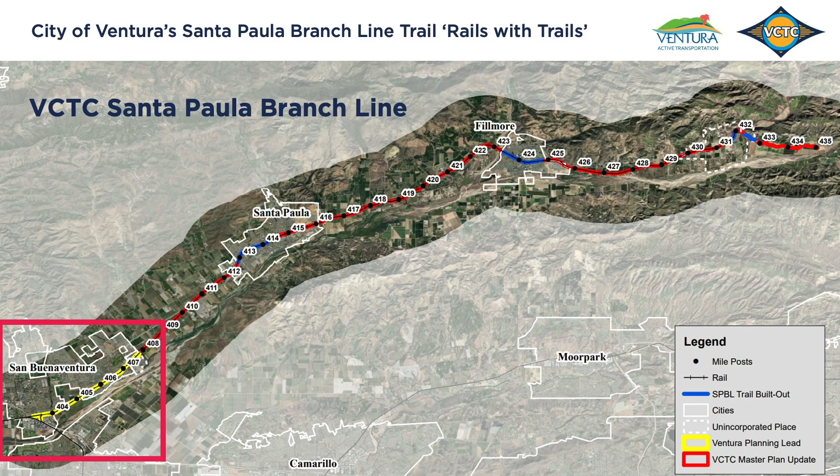Thank you, Martin. Eric, could we go back just to the map? I want to hit a couple of other highlights. I just want to mention that portions of the Santa Paula Branch Line Trail have been built out and have been operating for many years. And so you may have even used them and not even realized it—portions in the city of Santa Paula and the city of Fillmore, as well as a portion in the unincorporated Piru community. The focus of today's discussion is, of course, the Ventura section of the trail.

So the Santa Paula Branch Line corridor presents really a wonderful opportunity to build an active transportation route that is safer than many of the alternative routes along an existing publicly owned right-of-way that was acquired for use as a multimodal corridor. A rails with trails approach facilitates the use of clean transportation alternatives and improves connectivity with transit, which helps to foster transit ridership recovery through first and last mile solutions.

Taking a rails with trails approach has many benefits. VCTC estimates that the Santa Paula Branch Line Trail at full build-out will reduce vehicle miles traveled by somewhere between 23,000 and 46,000 daily vehicle miles traveled. And we estimate somewhere between 300 and 500 bike trips to occur daily on the trail. The trail's estimated to have between $2 and $7 million annual economic benefit and significantly reduce bike and pedestrian crashes within the corridor.

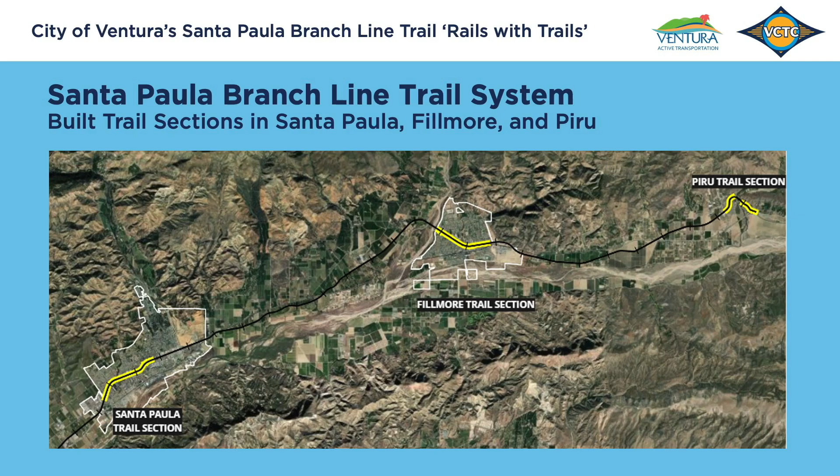In addition, the Sunburst rail bikes operate guided tours on rail-mounted, motor-assisted rail bikes along the Santa Paula Branch Line between the Santa Paula Depot in downtown Santa Paula and Largo Lane, which is west of Fillmore.

So now we'll do just a quick informal poll through a raising of hands, non-attributional, I promise. But which of these trail sections have you visited before? The Santa Paula section? Oh, wow. Fillmore? Piru? Yay, a few. Has anyone been on the Sunburst rail bikes yet? Oh, wow. Has anyone used the Ventura Railroad right-of-way section, but not on the formal trails? Or has anyone not used these trail sections before? Oh, good. So we have a good mix of experienced trail visitors and folks who are new to the trail system.

Because in the interest of time, I won't spend much more time talking about the Santa Paula Branch Line and as a railroad and its history, safety, and other aspects. But if you'd like more information, please do visit our website at goventura.org/SPBL. And with that context in mind, I'll turn the floor over to Brianne, who will focus on the project at hand, the 4-mile trail section in Ventura.

In addition to being chosen for Caltrans Cycle 6 application because of its priority project status, the project was funded because of its cross-jurisdictional support from VCTC and other state agencies. As Adam mentioned before, the project was funded through a collaborative effort.

Caltrans ATP 6 is paying for pre-construction funds, so we're in pre-construction now. That's what we call soft costs — permitting, design fees, things like that. The Congested Corridors program through CTC is what's funding project construction, and that grant funding has a deadline of December 2026. So your trail will be opened by December 2026.

As Adam mentioned before, the project spans the future trailhead in Montalvo all the way out to Saticoy, and this is us here tonight. So 4.2 miles crosses agricultural lands, residential lands, goes near schools, and crosses, as us Venturans know, the barrier that is Wells Road. So it's going to connect our communities together.

The things included in the 2022 grant application include the 4 miles of trail, kiosks and informational signs, bike repair stations, accessible ramps onto the trail, and traffic signals so it's safe to cross — we've got some great exhibits about that to learn about safety on the trail tonight.

Benches, trash cans, shade trees, exercise stations, water fill stations, solar lights so the trail will be illuminated to be used at all times of the year, bike and pedestrian bridges to get across some of our beautiful barrancas, and rest facilities.

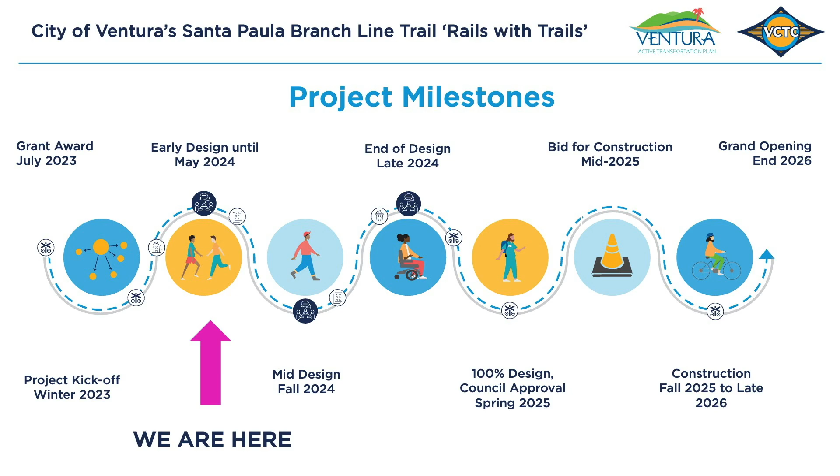It's anonymous, we won't hunt you down. And also show where you'd like to go using the trail. We also have a group brainstorm behind these lovely folks here in the back, where we'll give everyone Post-it notes for you to tell us your ideas about how the trail could be themed — art, signage, wayfinding, things like that. There'll be folks around that station as well to help you with that.

And we've got a few great exhibits about safety and other things up as well. So a little orientation to the project here: this is starting on the west end in Montalvo, looking at the first stretch.

For those of you who might be familiar, we have our East Ventura Metrolink station here, which provides the opportunity for what we're calling the Western Terminus Trailhead, an opportunity to access the trail right at the end of Bunting Avenue. From there, the trail will hug the north side of the rail line to Johnson Drive and encounter our first major crossing.

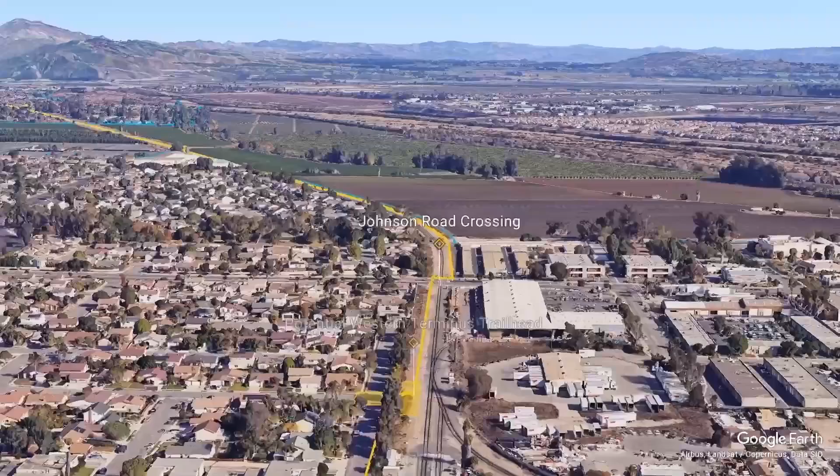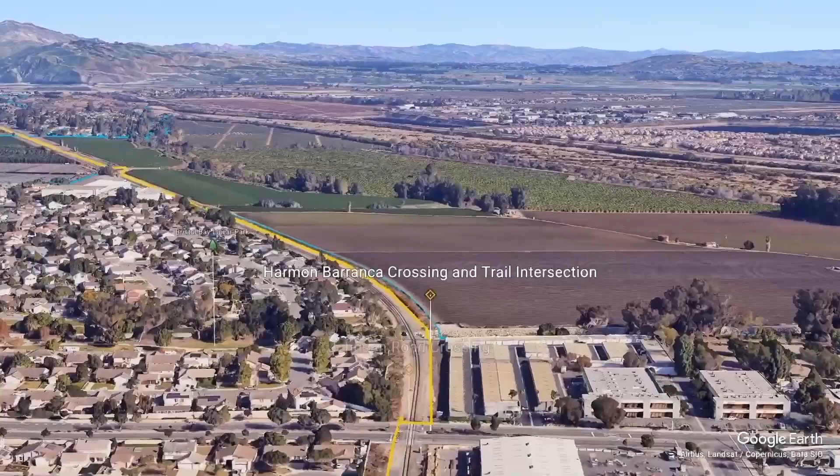Johnson is a very busy corridor, so let's look at how we get across it. Adam will tell you shortly about some of the safety crossings and what that might look like. At Johnson, you're going to see the trail flip to the southern side of the rail line for a couple of reasons. One big reason is it's the prime location to cross Harmon Barranca, our biggest major stream crossing along the alignment.

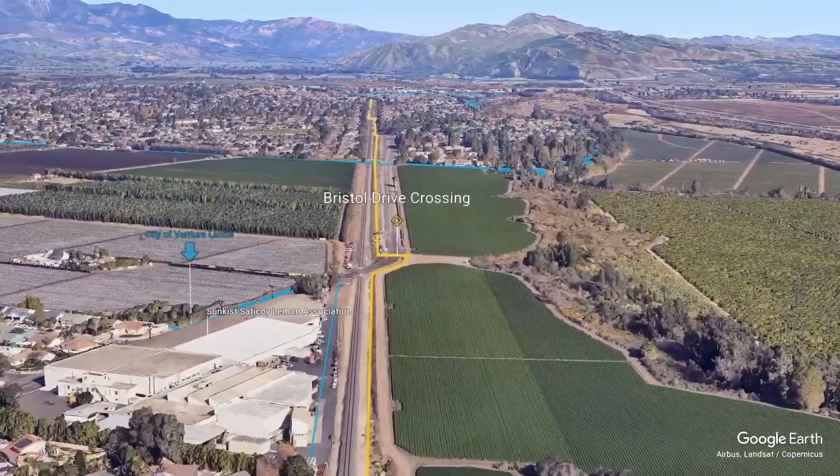The other reason is as we progress further east, the trail is further away from residential properties. It also avoids the Sunkist Saticoy Lemon Association plant and its proximity to the rail line, and provides the most ideal alignment to cross the complicated intersection at Bristol.

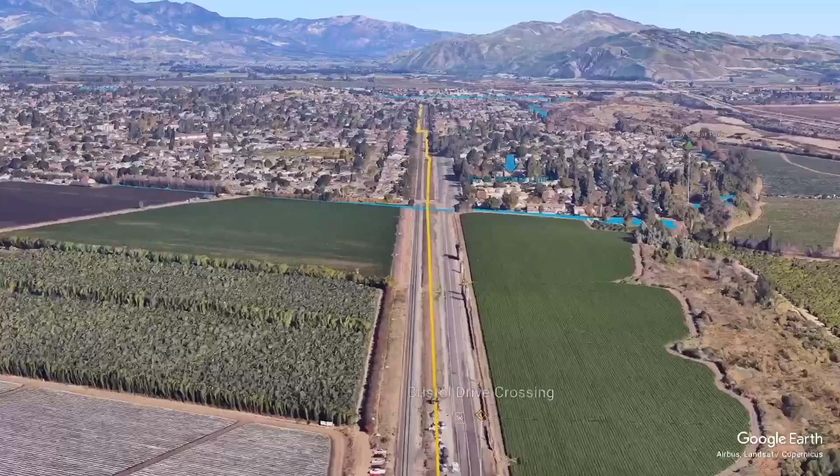Going further east, the trail will stay on the south side of the rail line, crossing Montgomery Avenue. As we get to the midway point of the trail, this is the ideal location to hit the key intersection at the end of Potomac Avenue, providing school walking access to Junipero Serra Elementary School on the left and Junipero Serra Park. There's already a connection there, and the trail will take advantage of this as a midway point.

Progressing further east, we enter the residential portion of the project, where residential properties are on both sides of the rail corridor. This first section is along the south side, but at South Pettit we'll transition to the north side, for a few reasons.

One reason is that the residences on the south side of the rail corridor through this next stretch are all considerably lower than the corridor itself. By moving the trail to the north side, we limit potential visibility impacts of the trail location. Additionally, it's the most ideal place to cross another one of our crossings, Brown Barranca, which is a major flood corridor.

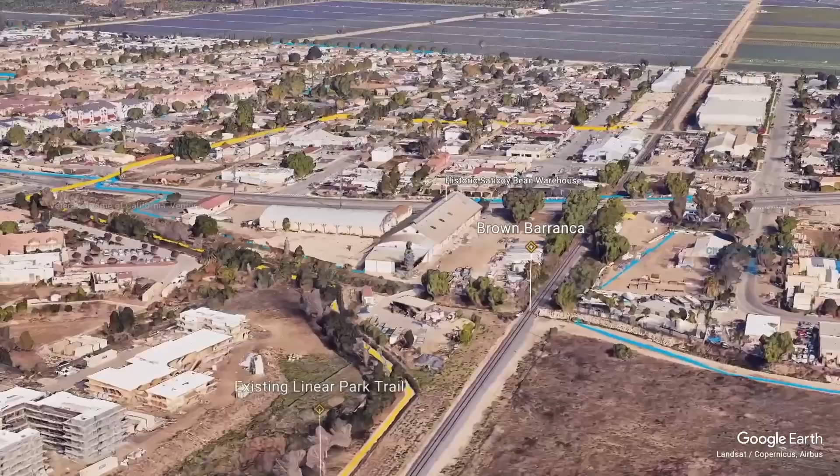Continuing on the north side across Saticoy Avenue, this is also the ideal alignment that transitions here. You'll see the trail move off the rail corridor into an existing trail along this linear park, which moves to the north around what is currently under construction — the Ventura Springs Veterans Housing Project and the Veterans Home of California.

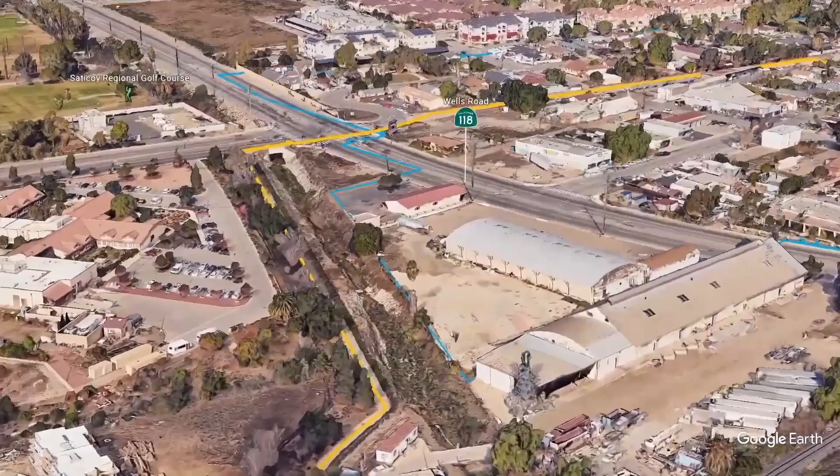One of the big reasons for this is we essentially get a twofer in this alignment. Wells Road is a really hard intersection to cross, and so is Brown Barranca. By using this alignment, we don't have to construct new bridges across Brown Barranca, and we can use existing intersection infrastructure at Wells and Telephone to get across the complications at Wells.

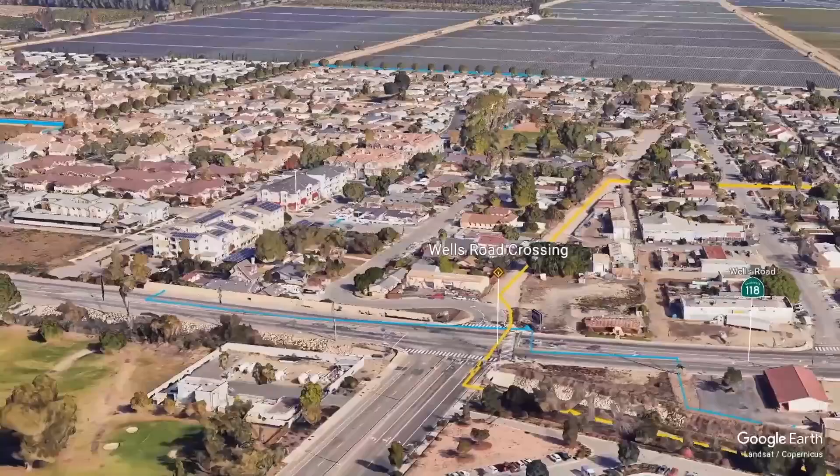Additionally, just on the other side of Telephone, the trail can use the existing storm drain easement that divides Saticoy. Those of you here know that Los Angeles Avenue, right there at the bottom, hidden by the play bar, does not continue through Saticoy and is broken by this storm drain easement.

A trail through here can facilitate a better connection, but also provides a great linkage to Saticoy Park and the Boys and Girls Club in the background, before we turn down Alalia Avenue and end at the historic Saticoy Depot, which will provide the eastern terminus trailhead for the proposed trail.

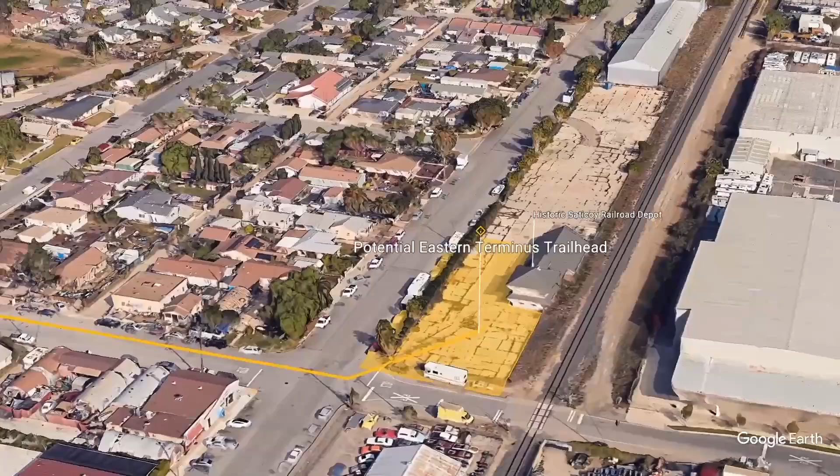Much of this is detailed on the enlargements that are here tonight, so we invite you, after the presentation, to take a look and see what's going on. We have some pictures, a video, and a Google Earth station set up. If anyone wants to get specific about where the trail might be or certain conditions, we can zoom in on that.

All right, we get to talk about a little bit of project design now — although Eric did a really good job, he could probably take my job here. So, getting right into it.

One of the things with project design is we want to give you an introduction to what you'll see at the next public meeting, which will include more detail — renderings and actual treatments at intersections. But to give you an idea of what we looked into and why you're seeing the alignment presented tonight, we take into account a lot of factors of design and safety.

One of the big aspects here, the main purpose with the trail, is level of stress. For all ages of bikers, this matters. Anytime you think of driving right adjacent to a vehicle, it's not very comfortable. So taking pedestrians and bicyclists directly off of anything adjacent to the roadway makes that level of stress a lot more enjoyable and safer. We take a look at route directness, access, and trail crossings.

Topography does play into this, so whether areas are higher or lower, as Eric was just saying. The right-of-way, the overall cost—we do have a budget limit for this project—constructability, overall risk, and overall permitting all factor in.

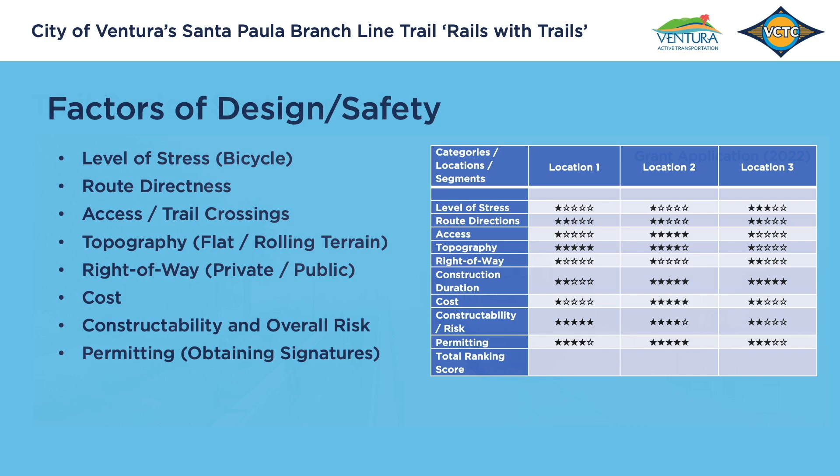This image is from the grant application that came through in 2022, and it's a visual depiction of what was included as part of that process. Later this year, you're going to see enhanced renderings of our actual design, not part of the grant, but how we're moving forward.

This is a brief overview of the various sections of the project, more engineering sections. We're just getting started, but each part of the project, particularly those segments bringing major intersections, presents unique challenges. We aim to collaborate closely with every stakeholder, and we're going to tailor engineering solutions to meet these challenges.

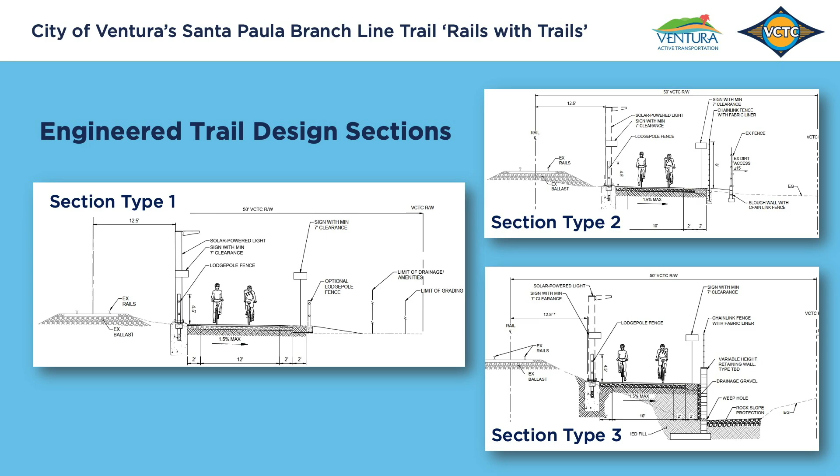Worth noting, the trail will have a minimum of about 12.5 feet—a mandatory offset from the center line of the rail to the edge of our trail. That's going to be enacted and will provide embedded safety adjacent to the trail, while the rail is still going to be operated. So it's rails with trails—we want both to operate at the same time, and we want both to be safe.

All right, I'm going to turn this over to Tori.

I'm going to touch on a few things that both Adam and Brianne talked about in the grant application, and you might have seen some of these amenities in the sections Adam was just reviewing. Some of the amenities we're looking to include are bike racks, benches, trash cans, potentially U-Fix-It stations, solar lighting, water refill stations, and exercise stations specifically at our trailhead node areas, and hopefully a few others in between.

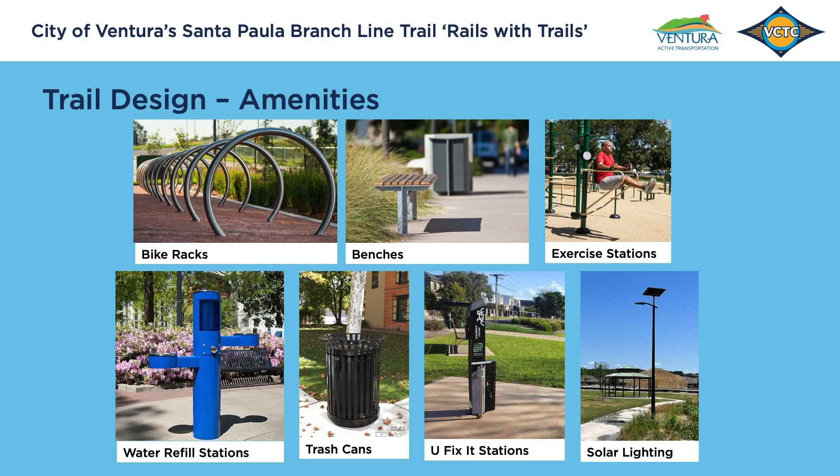Once again, we have some in-person hand-raising voting. Think about what you enjoy on other trails or what you'd like to see on this one, and raise your hand for as many as you'd like. Does anyone think highly of bike racks? A few. Benches? Lots of benches. Exercise stations—nice. Water bottle refill stations? Yes. Trash cans—lots of trash cans, very useful. U-Fix-It stations, yeah. And then the solar lighting.

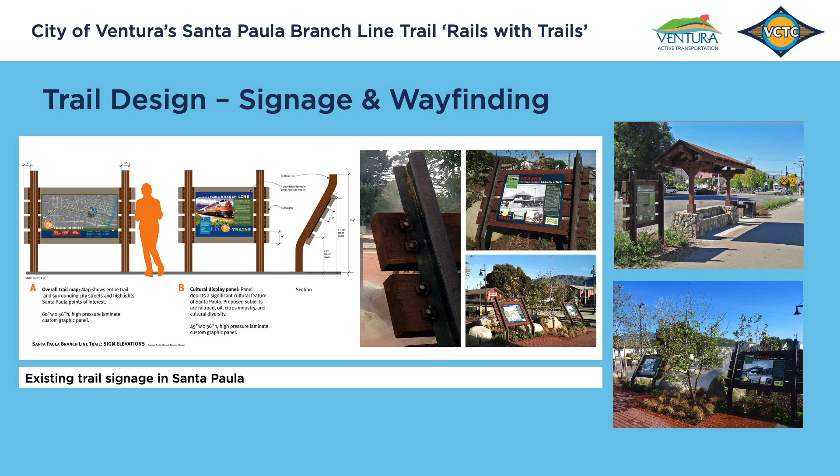If anyone has been through the Santa Paula section of this trail that's already designed, and the old railroad depot station out there, you'll see some of the signs that we at PCLD had the pleasure of designing a while ago for that section, looking into design precedents and what this could be. That's a clear inspiration and indicator for what we might see here, and specifically the signage takes a direct vocabulary from what a railroad might look like.

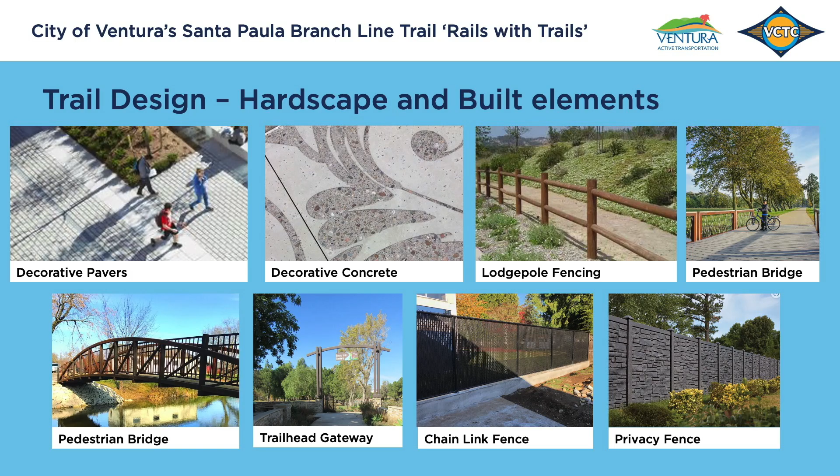In terms of hardscape elements, not quite as flashy as the amenities, but still super important for infrastructure, safety, and lots of other things on the trail, we have potential to include decorative pavers, decorative concrete, lodgepole fencing, one pedestrian bridge, trailhead gateways at the nodes and trailhead areas, and multiple fence type options depending on the surrounding conditions.

I've talked about the trailhead plaza node areas a couple times. We have two main ones, one at Montalvo and another at Saticoy Depot, and potentially a small one at the North Bank crossing.

So these are just areas that maybe we can put a little bit more design in. They're not just a simple bench on the side, and they can really incorporate trees and hardscape elements and really give a sense of place to the area.

And Adam's going to go talk a little bit more about safety.

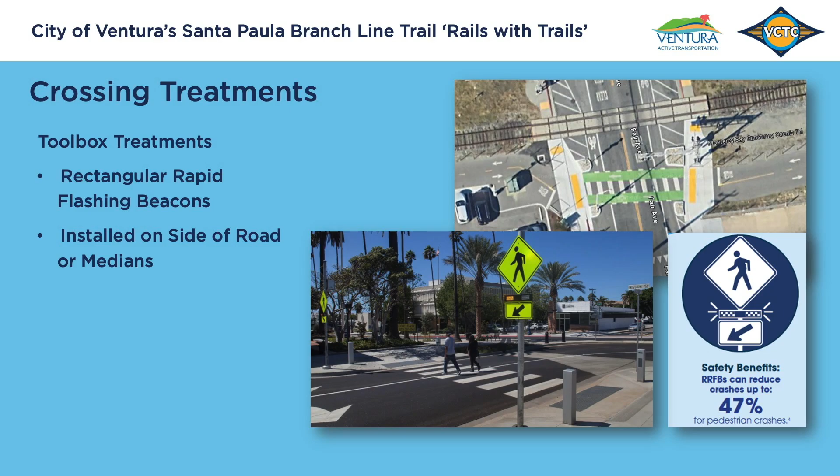So as with every project, we look at project safety, and it's multifaceted. We incorporate quite a bit of design strategies. We look at the amenities. We look at VCTC's policy. We look at the city's policy. And we look at enforcement.

These safety design strategies are typically achieved through a multidisciplinary approach. Think of civil traffic engineers, and then think of Eric over here as a landscape architect. So we work together to use that use of space. And it takes a team to be able to do it right.

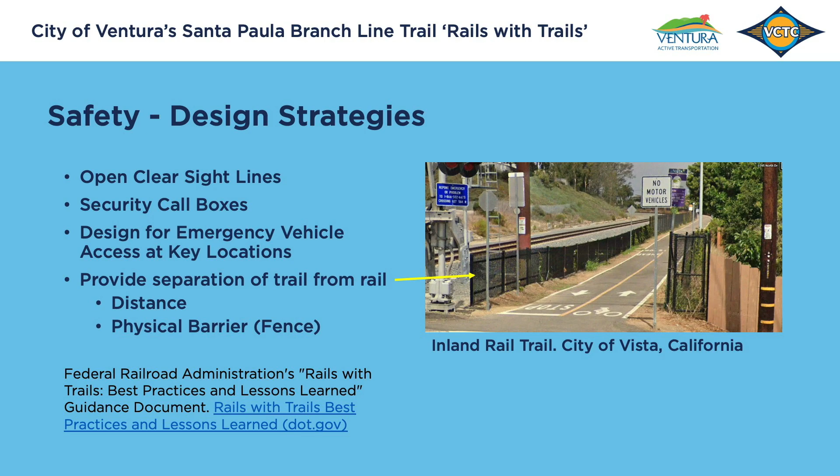So we focus on clear sight lines, enhanced visibility, placement of security call boxes, emergency vehicle access. We do want to maintain emergency vehicle access at all the entry points, at all the public intersections.

And just to highlight, I just want to say, who better to provide this overview to safety and enforcement than Watch Commander Ryan Weeks. Thank you.

So obviously design is a very big part of safety, but along with that goes police presence and law enforcement. A vast majority of this trail falls within the City of Ventura, so Ventura Police Department will respond to the majority of calls for service on this trail.

A couple of things that we can do that we want to get going right from the get-go, once the trail is formed, is we can start what we call our focus patrols. We want to have a heavy presence in the beginning. We want people to feel safe. We want to deter any kind of criminal activity. So we would want to be on and around the trail quite a bit.

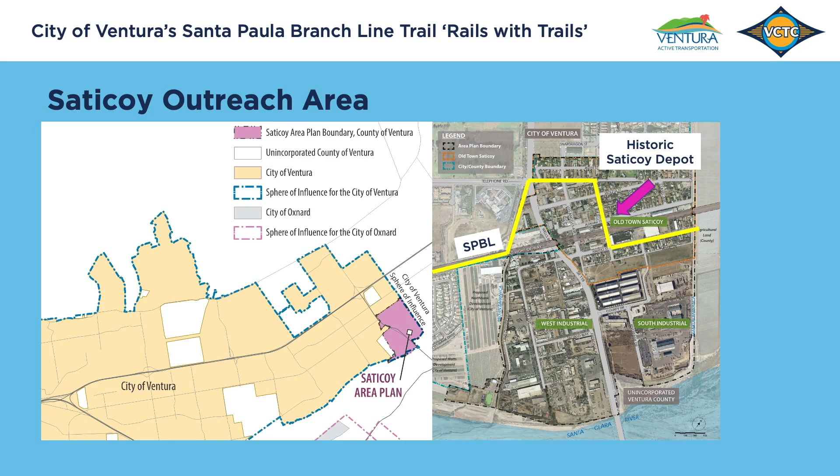So this is where Saticoy falls in the specific area plan and in the sphere of influence. It's essentially right up against the unincorporated Ventura lines, this ag land here.

The Saticoy Municipal Advisory Council was created by the County Board of Supervisors. There are ones for other unincorporated areas in our county as well. The MAC strives to increase citizen participation, so hopefully that's why some of you are here tonight from hearing about this at the MAC meeting in April. They also meet to talk about government issues pertaining to this specific community and learning about larger resources.

I mentioned our special stakeholder meetings. It's made up of 2 different meeting types. The first is led by Adam. These are more technical meetings working with agricultural leaders to make sure the project works both for the community but also our ag lands, which look like parks but are very much a working factory, so it's something we have to consider in planning this trail.

And then we've had one meeting with our community benefit organizations, leaders from local organizations that overlap with trail use, including Bike Ventura, Channel Islands Bike Club, some folks from our active transportation plan, and also Friends of Santa Clara River. We've got PTO, PTA folks, people from the local community councils, et cetera. It's a great group of people.

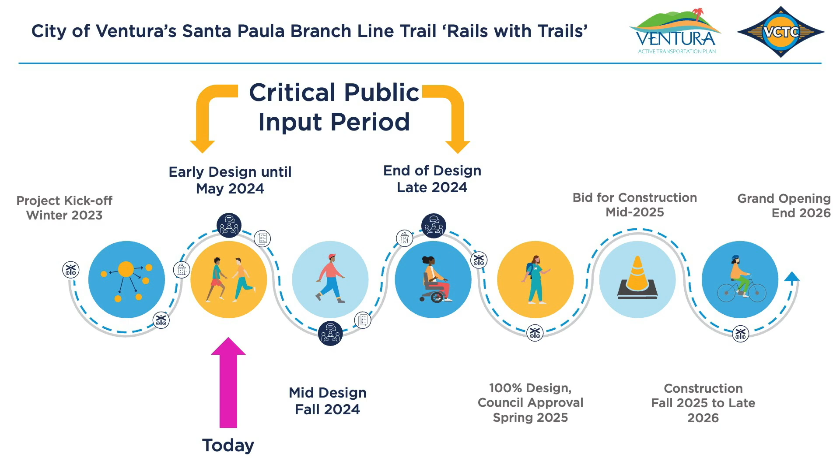I know I showed you this timeline before, but I wanted to bring it up again just to stress that this is the critical time to give input. Thank you so much for being here. Tell your friends, tell your neighbors, tell your family. If they are concerned about the project, excited about the project, or have ideas for the project, we want to hear from you, but that input period ends at the end of the year. That's why we've built out this robust effort, so we can work together heavily over the next 6 to 7 months. Again, these are the ways you can stay involved.

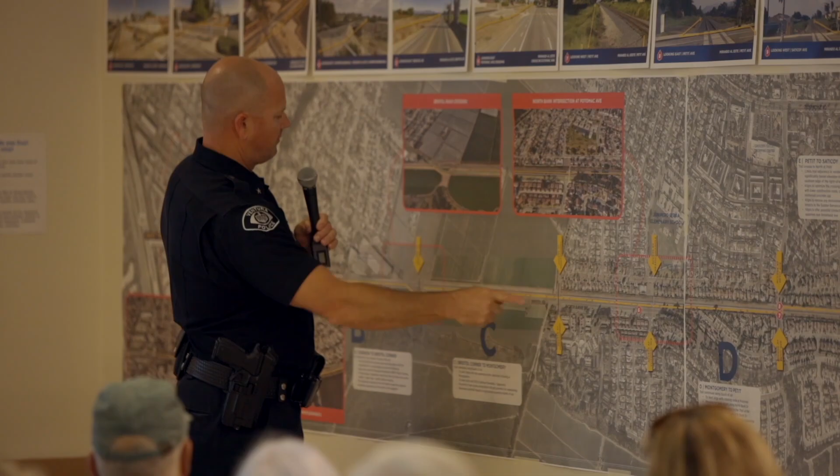Okay, and the other question was about the sheriffs—will they also have the right to respond to problems on the trailways? Absolutely. Really, our jurisdiction covers pretty much the whole thing. This section, in between Montgomery and Bristol, is Ventura County Sheriff's. So typically the way our responses go, if there's an emergency there, we'll go make sure everything's okay. If we find out there was a crime, like a traffic collision right here, we'll go, make sure everybody's okay, and then call the Sheriff's Department and say, hey, this happened in your jurisdiction. Anywhere there, and then once it goes over into Saticoy, same thing—if there's an emergency and we get the call, we will respond, make sure everybody's okay, and then if we realize we're in the Sheriff's jurisdiction, we'll call them and say, hey, this is yours.

Okay. And they can—anybody can call the Sheriff's Department. We're not taking any jurisdiction over the trail.

Anybody who lives in Saticoy is welcome to call the sheriff's department. We also have trouble with people driving too fast through Saticoy. Even right here on Violeta Street it happens. There's been accidents with pedestrians being hit, people on bikes being hit, and also on Azahar Street, which runs very fast.